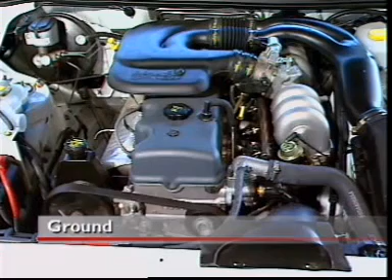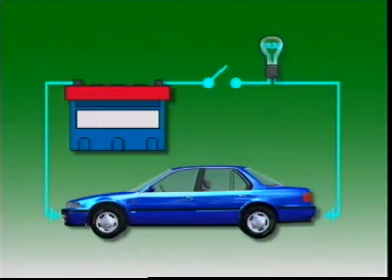Ground is a term used to indicate connecting a component to the vehicle frame or chassis. Current flows from the positive terminal of the battery through a controlling device such as a switch, then through the component. The return path is through the vehicle chassis or frame to complete the circuit and allow the component to operate. Using the vehicle frame in this way simplifies the circuit wiring.

A tachometer is used to indicate engine RPM. It is normally connected to the negative terminal of the ignition coil. The pulses from the ignition primary circuit are then used as an input to operate the tachometer. At idle speed, the frequency of the pulse is steady. As the engine speed rises, the frequency of the pulse increases as the tachometer indicates.

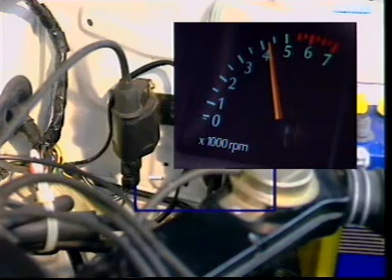A tachometric relay uses the same input from the negative side of the ignition coil to ensure the relay operates only when the engine speed is above a specified minimum, say 350 RPM. In this case, it operates as a safety device, ensuring the fuel pump operates only when the engine speed exceeds this figure.

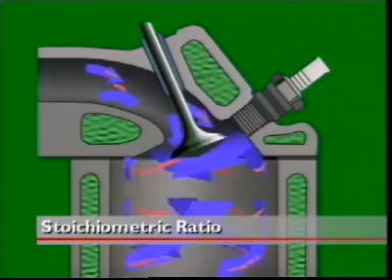The term stoichiometric ratio describes the chemically correct air-fuel ratio necessary to achieve complete combustion of the fuel. It is represented by the Greek letter lambda. The value of the ratio is 14.7 parts of air to 1 part of fuel. By mass, that's 14.7 kilograms of air to each kilogram of fuel. So if lambda equals 1, the air-fuel mixture is at the stoichiometric ratio of 14.7 to 1.

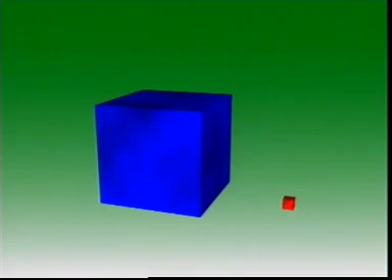If an air-fuel mixture has a higher figure, say 1.03, there is more air in proportion to the fuel than 14.7 to 1, and the mixture is slightly lean. A mixture with a lower lambda value has less air, proportionately, than fuel, and the mixture is slightly rich.

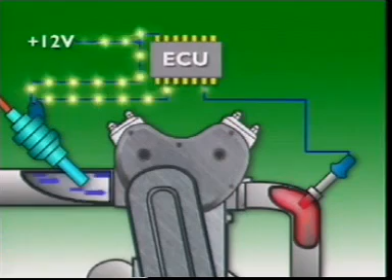The exhaust gas oxygen sensor is also called the lambda sensor, since it can be used to maintain the air-fuel ratio at lambda equal to 1, within very close limits. It can be installed in the exhaust manifold, where it measures the percentage of oxygen in the exhaust gases. A high percentage of oxygen may mean too little fuel is entering the engine, the mixture is too lean, and the lambda is greater than 1.

The sensor delivers this information to the ECU, which adjusts the mixture accordingly. Similarly, a low percentage of oxygen may indicate too much fuel is entering the engine, the mixture is too rich, and the lambda is less than 1.

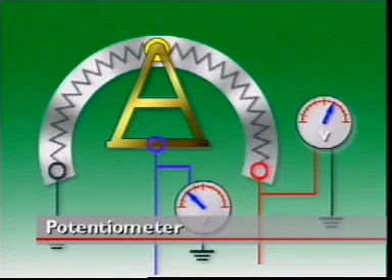A potentiometer is a mechanically variable resistor which, in EFI applications, is normally a film type. It can be linear or circular in construction and has 3 electrical connecting points. 2 are at the ends of the resistor and the third is attached to a center sliding contact, arranged to move across the resistor. A reference voltage is applied to the resistor so that a steady current flows through it.

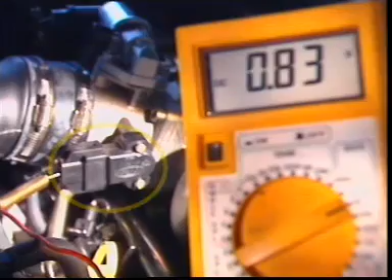As the center sliding contact moves across the resistor, it measures the voltage at the point it is in contact with, and provides a reference voltage for that position. In automotive applications, the circular form is commonly used as a throttle position sensor, with the center contact attached to the throttle plate. The throttle plate position can then be monitored by the control unit.

The density of air is its mass per unit volume. This means a volume of air at high density has a higher mass than the same volume at low density. And if there is a larger mass of air, it will contain proportionally more oxygen.

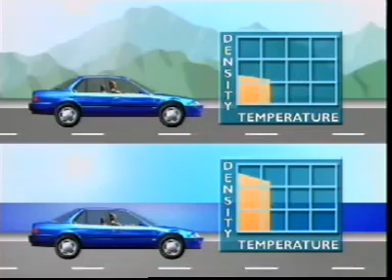The density of air in the atmosphere changes at different temperatures and altitudes. That means the air that enters an engine at different locations could have very different amounts of oxygen. The amount of oxygen in air directly affects how well it supports combustion, so it can be important in determining an air-fuel ratio for an engine.

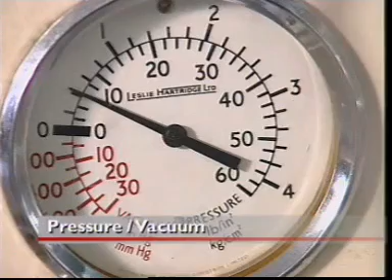Pressure and vacuum are terms in everyday use in the automotive industry. Manufacturers recommend a pressure to which tyres need to be inflated, and manifold vacuum is used to operate a brake booster. Gases exert pressure on all bodies they make contact with.

This applies also to the air in Earth's atmosphere. Air has mass, and as a result it exerts pressure, called atmospheric pressure, not only on the Earth's surface, but also on all objects on the Earth's surface.

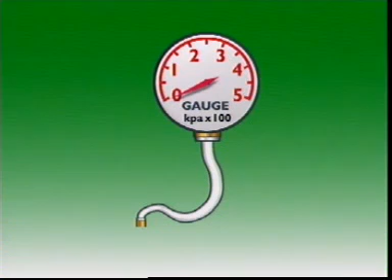Atmospheric pressure varies with altitude, but at sea level it is calculated as 101.3 kilonewtons per square metre, or 101.3 kilopascals. But if this is so, why does a pressure gauge read 0 when it is not in use? This is because the gauge indicates pressure above atmospheric pressure only. This reading is called gauge pressure.

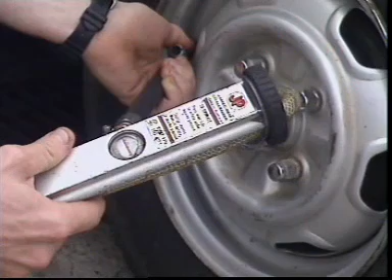If absolute pressure was needed, an absolute pressure gauge would be needed, and it would read 101.3 kilopascals when not in use. Absolute pressure equals gauge pressure plus atmospheric pressure. Readings on an oil pressure gauge or a tyre gauge should really have 101.3 kilopascals added to them. It is normal practice, however, for the gauge reading alone to be taken as the accepted value.

If pressure being measured is below atmospheric, a pressure gauge with its 0 reading is of no value. This is why, for pressures below atmospheric, as in a manifold vacuum or depression, a vacuum gauge is normally used.

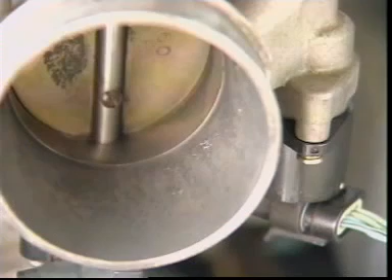In a petrol engine, the position of the throttle plate controls the volume of air, or air-fuel mixture, entering the manifold. At idle speed, the pistons draw air away from the manifold at a faster rate than it can pass the throttle plate into the manifold. A high vacuum, or a depression, exists.

At wide open throttle, depending on load, the vacuum is much less, and pressure in the manifold rises, closer to atmospheric. A vacuum gauge can be calibrated in millimeters of mercury, and the scale reads from 0 to 760.

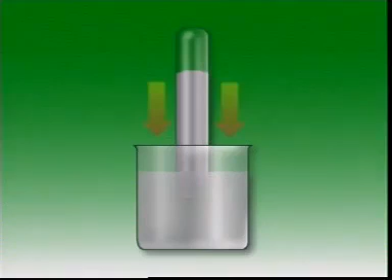The scale is derived from the fact that atmospheric pressure supports a column of mercury 760 millimeters high. This glass tube, closed at one end, is filled with mercury, then inverted in a bowl of mercury. The column of mercury in the tube falls to about 760 millimeters. The space above the mercury is a vacuum, and the atmospheric pressure on the exposed surface of the mercury supports the column. At sea level, atmospheric pressure supports a column of mercury 760 millimeters.

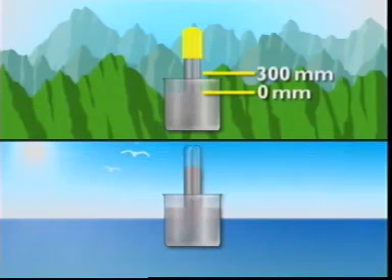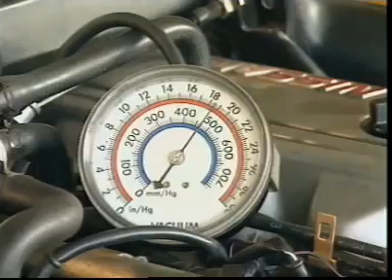But at higher altitude, its height falls, which indicates that atmospheric pressure at that altitude is less. A scale of 0 to 760 millimeters can thus be used to indicate the degree of vacuum or depression that exists below atmospheric pressure. At idle speeds, a vacuum gauge connected to the intake manifold will indicate a reading of approximately 450 to 500 millimeters of mercury, depending on altitude.

Some engine management systems signal changes in atmospheric pressure by using a barometric pressure sensor in the ECU. This is because, above sea level, air pressure is reduced. So to maintain correct air-fuel ratio, a vehicle has to reduce the amount of fuel delivered to the engine.

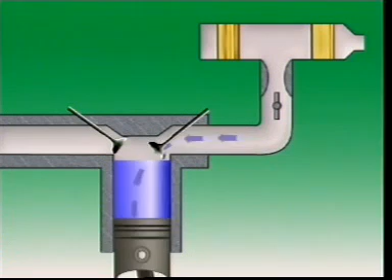Volumetric efficiency compares the volume of air entering a cylinder during intake to the internal volume of the cylinder when the piston is at bottom dead center. It is usually expressed as a percentage. In a naturally aspirated engine, one without forced induction, volumetric efficiency can never be 100%. This is because of the resistance to the airflow that occurs at the carburetor, manifold, and the intake valve.

With forced induction, the incoming air is compressed so that a greater volume and mass of air is forced into the cylinder during the intake stroke. That takes the volumetric efficiency to above 100%.

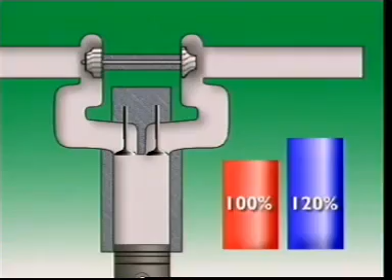This section examines basic principles of electronic fuel injection. Because of the need to comply with exhaust emission regulations, the modern petrol engine requires a fuel system of extreme accuracy and long-term reliability. A correctly matched air-fuel ratio must be available at all times and under all conditions. This is satisfactorily achieved by electronic fuel injection.

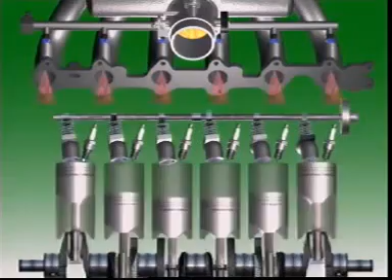EFI is a pressurized indirect injection system that uses solenoid-operated injectors with a fixed orifice. When they're energized, fuel passes through the injector body. This arrangement is called a multi-point system. One injector is located in each intake manifold runner or pipe adjacent to each cylinder.

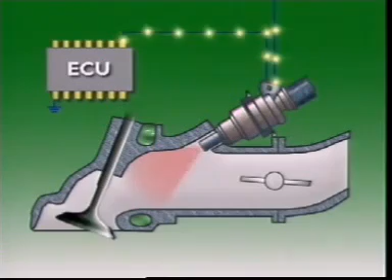An electronic control unit, or ECU, opens the injectors by pulsing their electrical current. They spray fuel into each intake port directly in front of each intake valve. Fuel leaving the nozzle is atomized, and it mixes with the air also entering the system to form a combustible mixture.

Fuel pressure is kept at a constant value above manifold pressure, so that the amount of fuel injected is determined only by the length of time the injector is held open by the ECU. This is called the pulse width of the injector.

The triggering signal to operate the injectors can be supplied from the ignition system or from crank angle sensors on the crankshaft or the camshaft. Engine fuel requirements change according to engine speed, load, and temperature, so the ECU needs information on these changes. Sensors measure these variables, then relay the information to the ECU in the form of electrical signals. The ECU then calculates the duration of pulses necessary to provide the fuel required.

Extra fuel required during cold starting can be supplied by increasing the number of injection pulses, or by fitting a separate cold start injector that operates independently of the main injectors when the engine is cranking.

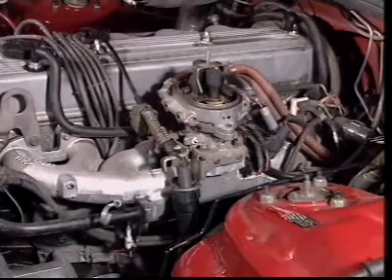The throttle body injection system, also called a central fuel injection system, has a single injector, or in some cases 2 injectors, mounted in a carburetor-like throttle body. The throttle body assembly is fitted to the flange of the intake manifold, and fuel is sprayed into the intake air entering the manifold. The air-fuel mixture is then carried through the manifold into the engine. Fuel pressure is maintained at a constant value, and an ECU pulses the injector or injectors.

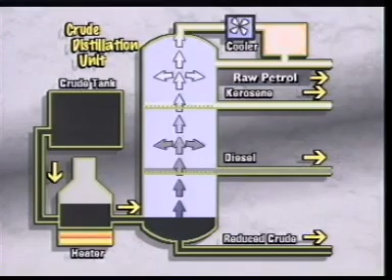This section examines petrol fuel. Petroleum or crude oil is taken out of the ground as a mix of impurities and highly flammable compounds of hydrogen and carbon, called hydrocarbons. It is processed into many products, including petrol and diesel fuel.

Petrol is used in different forms in different engines. It is very volatile, mixing easily with air to form gas or vapour. The more effectively liquid petrol is changed into vapour, the more efficiently it burns in the engine, so high volatility is desirable.

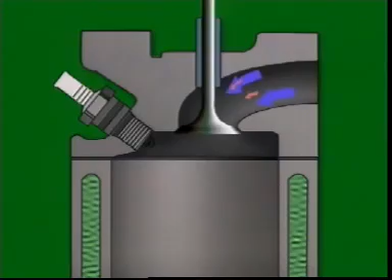How petrol burns must be controlled. If it burns too quickly, it can cause detonation, sometimes called ping or knock. So special additives are used to slow down the rate of combustion. Octane rating is a measure of how well a petrol resists detonation. The higher the rating, the less likely it is that detonation will occur.

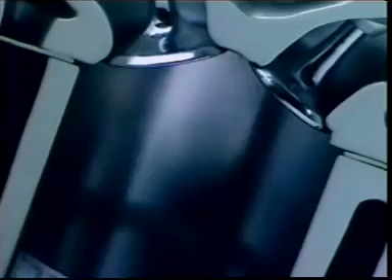Higher operating pressures in the combustion chamber can also cause abnormal combustion. A lead-based anti-knock additive used in leaded petrol can allow these higher pressures without loss of performance. Lead additives are also lubricants. In high-compression engines, lead compounds coat valve faces and seats and help prevent wear.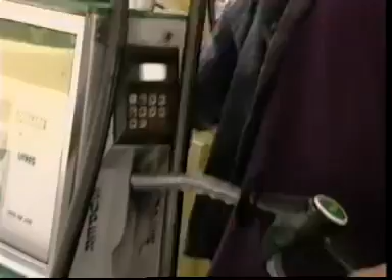Leaded petrol is used in older cars that have few or no emission controls. It should never be used in engines designed for unleaded fuel. Governments now limit levels of lead in petrol, and unleaded petrol is replacing leaded petrol. So-called unleaded petrol may contain small amounts of lead, but maximum levels are tightly controlled.

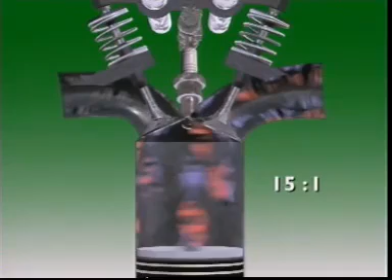For petrol to burn properly, it must be mixed with the right amount of air. For a petrol engine, the air-fuel ratio by mass is about 15 to 1. By volume, it's about 11,000 to 1. Not much petrol, but lots of air.

A lean air-fuel mixture has more air in proportion to the amount of fuel. A slightly lean mixture gives good fuel economy and low exhaust emissions, suitable for cruising conditions. A mixture that's too lean can make an engine run roughly and overheat.

A rich air-fuel mixture has less air in proportion to the amount of fuel. A slightly rich mixture can produce more power at lower temperatures, but the extra fuel it uses steps up fuel consumption and emissions. A too rich mixture fouls spark plugs and causes incomplete burning, and that reduces power.

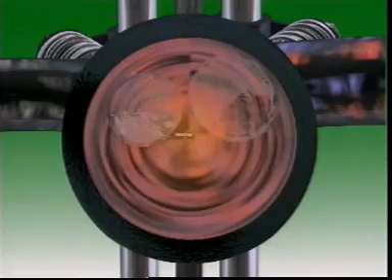In normal combustion, the spark plug ignites the mixture and a small ball of flame forms around the tip of the plug. The piston compresses the mixture, the flame spreads faster and moves evenly to halfway through the mixture. The piston reaches top dead center. The flame picks up more speed, then shoots out to consume the rest of the mixture. Combustion ends with the piston a short way down the cylinder.

Detonation is a violent collision of flame fronts in the cylinder caused by uncontrolled combustion. It occurs after the spark plug has fired. The sudden rise in pressure can cause a knocking sound.

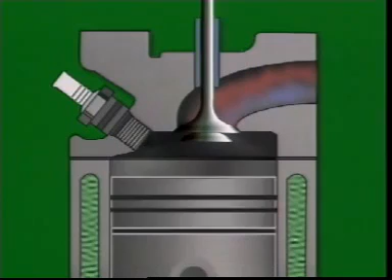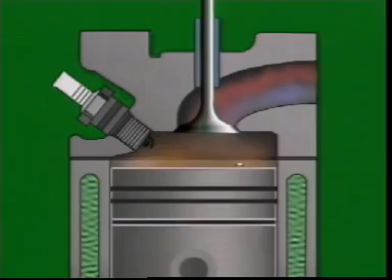Sustained detonations can lift temperatures enough to cause pre-ignition, also called auto-ignition. Pre-ignition occurs before normal combustion, when something in the combustion chamber heats up enough to ignite the mixture before the spark plug fires. A mixture may also ignite simply because it is unstable under the higher heat and pressure. Detonation and pre-ignition can cause severe damage and must be avoided. Engine management systems use knock sensors to detect detonation, and they retard ignition to stop it.

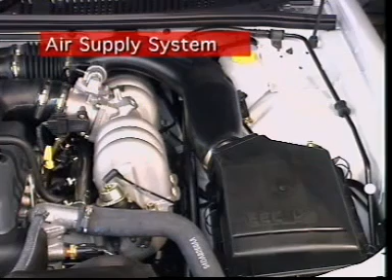This section examines the air supply. In multi-point injection systems, the air required for the combustion of the fuel is led from the air filter through the throttle valve and into the common manifold or plenum chamber. From here, individual intake runners or pipes branch off to each cylinder. All of these pipes are of equal length.

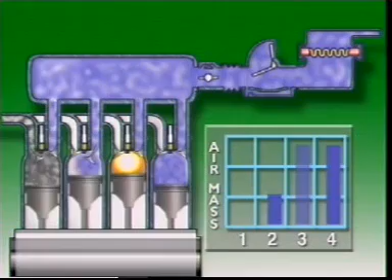The design of the intake system determines how large an air mass can be drawn into a cylinder at any given engine RPM. This is where most advantage can be taken of electronic fuel injection, since it can achieve exactly uniform distribution of the air delivered to the cylinders.

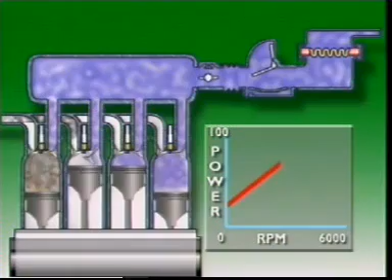With unobstructed passages to each cylinder, the cylinder fills with air as efficiently as possible. The breathing of the engine, or its volumetric efficiency, is improved. The more air crammed into the cylinder, the denser the air-fuel mixture when ignition occurs. This increases the thrust on the piston and increases engine power output too.

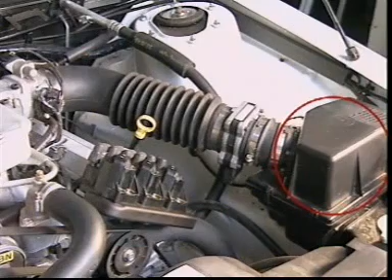The temperature of the air influences how dense the air-fuel mixture will be. Cold air is denser than hot air, so it has a greater mass in any given volume. This is why, on most intake systems, the air entry to the intake is away from engine heat, to ensure the entry of cool air.

Since the manifold carries air only, it doesn't need to be heated by coolant. Filtered air arrives at the intake port as cold and dense as possible, ready for mixing with the fuel from the injector.

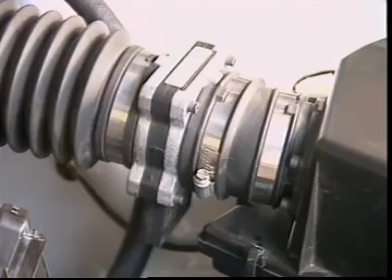The amount of air entering the engine must be measured, so that the amount of fuel injected into it forms a mixture to suit the engine operating conditions at that time. The volume of air entering the engine varies according to the position of the accelerator pedal and the engine speed and load. Changes in volume are reflected in changes in manifold pressure between the throttle plate and the intake ports.

When the pistons draw air away from the manifold more quickly than air can pass the throttle plate into it, the pressure in the manifold falls. At idle speeds, this pressure is low. A high depression or a vacuum exists. As the throttle plate opens, the pressure approaches that of the atmosphere. The depression or vacuum tends to fall in value.

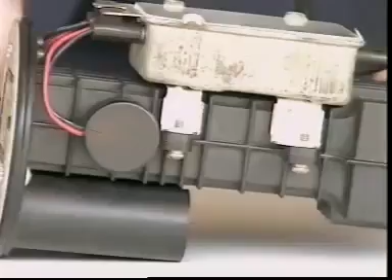Devices measuring air entering the engine send a varying electrical signal to the ECU. The signal can be a measure of the volume of air or of the manifold pressure. In both cases, this information is combined with the engine speed signal to provide the basic setting for the injector pulse width.

An airflow meter measures the volume of filtered air entering the engine. It can be mounted on the air filter casing or close by. All air entering the intake flows through the meter, then through a sealed flexible hose or duct to the throttle body, then enters the engine.

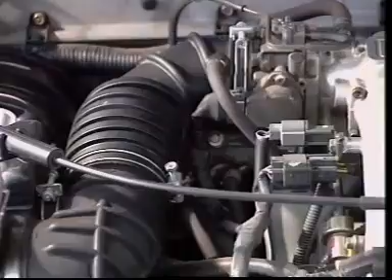Vane-type airflow meters have a spring-loaded vane or flap, which deflects according to how much air enters. The electrical signal to the ECU varies with this deflection, as contacts attached to the vane move across a potentiometer. The intake system must be airtight, with no leaks downstream of the meter, otherwise inaccurate signals will be sent to the ECU.

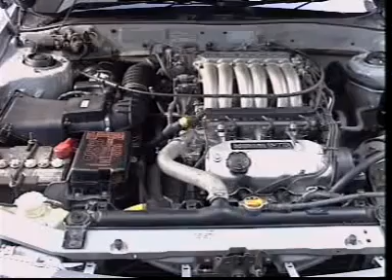This section examines the fuel supply system.

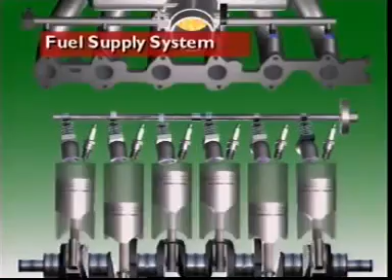The purpose of any fuel supply system is to deliver fuel to the engine in a form in which it can mix with air to form a combustible mixture. The fuel must be finely atomized to mix with the air. This is why injection systems deliver the fuel under pressure.

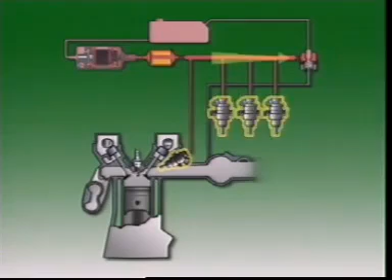The EFI system is a circulation system. Fuel is drawn from the tank by a fuel pump and delivered to solenoid-operated injection valves. Fuel pressure at the valves is maintained by a fuel pressure regulator, and excess fuel flows back to the tank through a return line. The fuel filter is directional. It is fitted between the pump and injection valves to stop contaminants reaching other parts of the system.

The fuel pump can be mounted externally on the chassis frame or submerged in the fuel in the tank. It is electrically operated and electronically controlled. It is driven by a permanent magnet electric motor, a sealed unit integral with the pump. Fuel flows through the pump and around the electric motor when it is running. There is never an ignitable mixture inside the pump housing, so there is no danger of explosion.

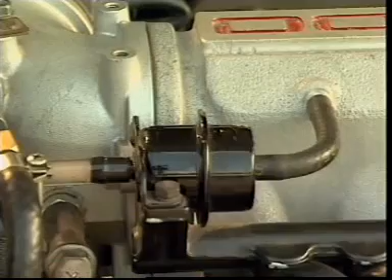The pump delivers more fuel than the maximum requirement of the engine, so pressure in the fuel circulation system is maintained at all times. A fuel pressure regulator maintains fuel pressure between the pump and the injectors.

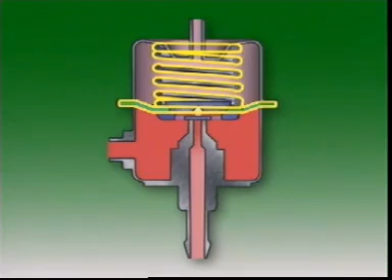In multi-point injection systems, the fuel pressure regulator has an inlet connection from the fuel rail and an outlet that lets fuel return to the tank. A control diaphragm and pressure spring determines the exposed opening of the outlet and the amount of fuel that can return. So the strength of the pressure spring determines fuel pressure in the fuel rail and keeps it at a fixed value.

However, the pressure in the intake manifold varies considerably with changes in engine speed and with load, so the pressure drop across the injector must also be taken into account. For any injection duration, if fuel is held at constant pressure, then as manifold pressure varies, so does the amount of fuel delivered. That means fuel pressure must be held constant above manifold pressure.

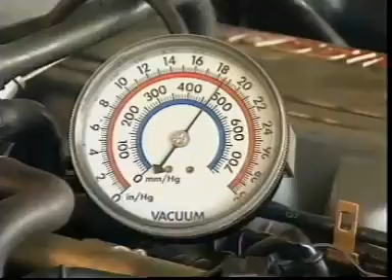This is done by sealing the spring housing of the pressure regulator and letting it sense manifold pressure via a connecting hose. Then, when the manifold pressure alters, so does the fuel pressure. When manifold pressure is low, as at idling, fuel pressure is low. As manifold pressure rises towards open throttle, so does fuel pressure.

Since the injectors are all subjected to the same pressure, they all inject an equal amount of fuel. The quantity of fuel delivered is thus controlled very accurately by the pulse width of the injector.

Manifold pressure sensing is not required in throttle body systems, as the injection occurs above the throttle plate at atmospheric pressure. So fuel pressure is determined by the force of the regulator spring acting on the diaphragm.

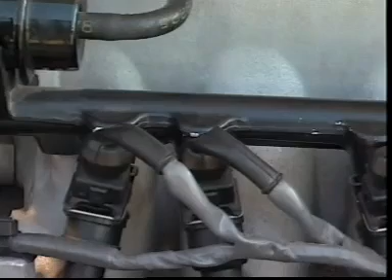The injectors are sealed into the manifold by O-rings that prevent air entering at that point. The O-rings, together with plastic caps on the injector nozzles, also act as a barrier to heat being transferred to the injector body. For a short time after an engine is switched off, engine temperature keeps rising, and that can cause excessive vapour in the fuel lines.

This pump stops this with a non-return valve on its outlet, which maintains the pressure in the fuel line during that short time. This pressure will decay over about 20 to 30 minutes, but it ensures effective hot starting characteristics.

When the engine is running, the circulation of fuel ensures cool fuel is being delivered at all times, and vapour formation is prevented. The pump control circuit normally allows the pump to operate for a few seconds only when the ignition is switched on, and thereafter during cranking, and when the engine is running above a specified minimum RPM.

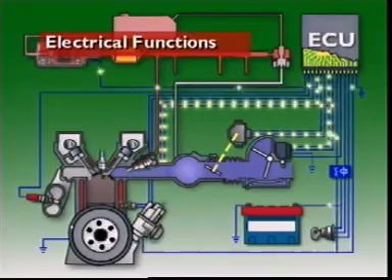This section examines electrical functions in EFI. In the electrical system, detecting elements sense engine operating conditions and relay this information in the form of electrical signals to the Electronic Control Unit, or ECU. The ECU is a small computer programmed with the operating characteristics of each individual application. This information is stored in its memory.

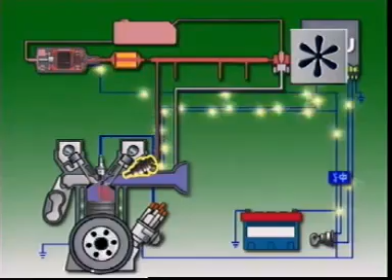The control unit processes input signals to determine the amount of fuel required by the engine at that instant. It then grounds the injection valve circuit to open the solenoid-operated injection valves. The length of time injectors stay open in milliseconds determines how much fuel is injected.

A basic EFI system needs input signals on ignition switch operation, engine cranking, the amount of air entering the engine, coolant temperature, throttle position and engine speed, and battery voltage. The varying data received from all of these inputs allows the ECU to arrive at its injection setting.

This vehicle began from a cold start and has been running only a short time. It is now operating in top gear with a light throttle only. What influences its fuel requirements?

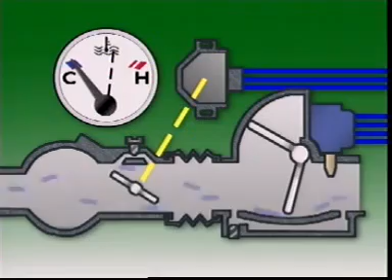A relatively small volume of air is entering the engine. The throttle position is associated with economy or cruising conditions. Engine speed is in the low to mid-range. Coolant temperature is still below normal. These factors combined produce a fuel setting.

It is less than if the throttle were opened suddenly for acceleration or to overcome increased load. However, it is more than it would be if coolant temperature were at its normal level.

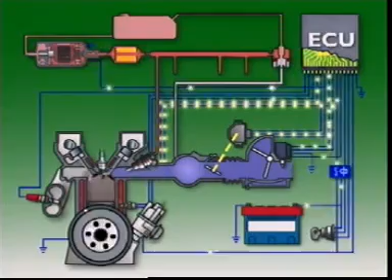The varying signals can be supplied by variable resistors, by switch contacts, by voltage pulses from the ignition system, or by sensors.

An airflow meter varies its signal by the deflection of a vane as air enters the engine. Deflecting the vane moves contacts across a potentiometer to signal its position and thus the amount of air entering the system.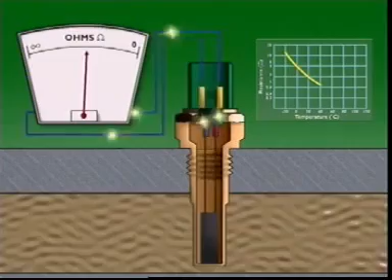The temperature sensor uses material with a negative temperature coefficient of resistance. Its resistance is high when it's cold, but it falls as its temperature rises. It's called a thermistor. This is the opposite of a normal resistor, which increases its resistance as temperature rises.

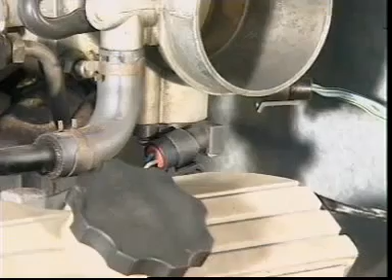The coolant temperature sensor is immersed in coolant in the cylinder head. The air temperature sensor is in the air intake at the airflow meter or in the manifold.

Throttle position can be signaled by a potentiometer attached to the throttle shaft. It provides a continuous varying signal through the entire range of throttle position. Throttle position can also be signaled by a contact type switch, but it signals the idle and fully open positions only.

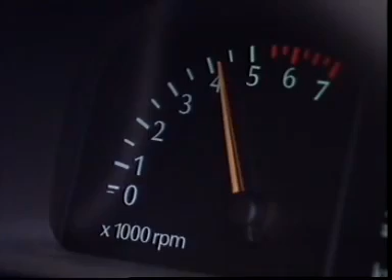Engine speed can be detected by a connection from the ignition system primary circuit or by a pulse generator type sensor on the crankshaft. The pulses are computed by the control unit into an engine RPM figure. They can also be used to trigger the injectors.

In multi-point injection, the injectors can all be triggered at the same time. This is called simultaneous injection, and the injectors operate twice per cycle, once each crankshaft revolution, each time delivering half the fuel for the cycle.

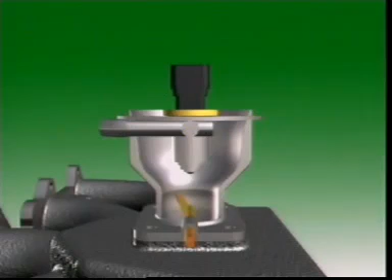In a 6-cylinder engine, the injectors are triggered on every third ignition pulse. In throttle body systems, the central injector is normally triggered on every ignition pulse. However, if there are 2 injectors, alternate triggering may be used. At idling speeds, the frequency may be less to provide finer control.

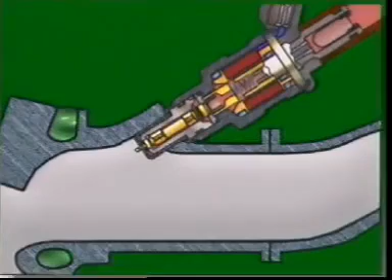The actual operating time of the injectors depends very much on battery voltage. The response time to lift the injector needle to the fully open position is about 1 millisecond. If battery voltage is low, this response time takes longer and the engine receives less fuel. The ECU can compensate for this delay in opening time by extending the duration of the injection pulse.

In more sophisticated engine management systems, the control unit can control additional functions such as ignition timing, injection modes, idle speed, cooling fans, and fuel pump operation. To do this, however, more inputs are needed.

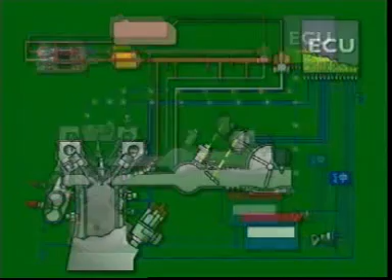To control ignition timing, some systems replace the distributor with a direct fire ignition system. Between one ignition point and the next, the ECU calculates when the ignition point will occur. It then triggers the ignition accordingly. Ignition can be varied according to load, speed, coolant temperature, cranking speed, and battery voltage.

Identifying number 1 cylinder and the camshaft position allows different injection modes to be used. Sequential injection means injection occurs in the sequence of the firing order. Each injector opens once only in each cycle to deliver the fuel needed.

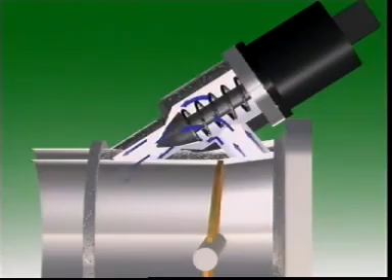Added load placed on the engine during idle can be compensated for by increasing the passageway of an idle speed control device. This lets more air bypass the throttle plate. This air has been measured by the airflow meter, so extra fuel is metered to maintain the same air-fuel ratio. The extra mixture thus delivered increases engine torque and maintains idle speed.

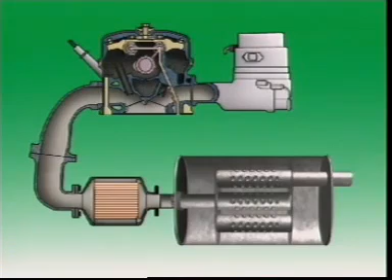For efficient operation of the catalytic converter, the mixture ratio must be maintained close to the stoichiometric ratio, 14.7 parts of air to 1 part of fuel.

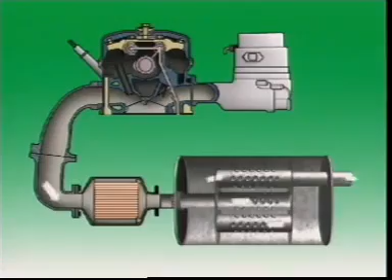Efficiency of combustion can be monitored by measuring the percentage of oxygen in the exhaust gas. A high percentage may mean the mixture entering the cylinder is too lean.

The oxygen sensor in the exhaust manifold or in the engine pipe tells the ECU how much oxygen is in the exhaust gas. The ECU then varies injector opening time to achieve a correct mixture ratio.

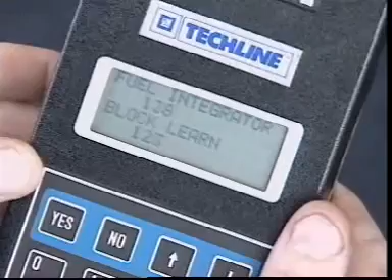Feedback also lets fuel settings change as components age. This is called adaptive learning. The ECU memorizes its fuel settings for different operating conditions and stores them for future use.

If a fault occurs in a component or part of a system, a fault code can be displayed on the check engine lamp in front of the driver. Alternatively, a scanning tool can be connected to a diagnostic terminal and information on the fault can be analyzed.

Although most injectors operate at the nominal battery voltage of 12 volts, many sensors have a reference voltage of 5 volts. This is done by a voltage regulator in the control unit. It gives more accurate signaling, as fluctuations due to changes in battery voltage do not occur.

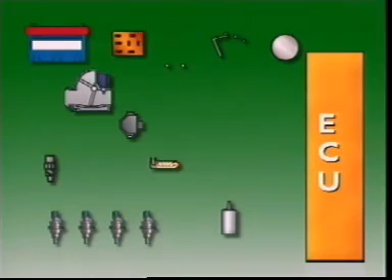This is a simplified wiring diagram for an EFI application. The battery is grounded to the vehicle frame at the negative terminal. Its positive terminal is connected to a tachometric relay and to the ignition switch.

A connecting wire runs from the tachometric relay to the positive terminal on the fuel pump. A fuse in the connecting wire protects the circuit. The fuel pump circuit is completed by grounding the fuel pump negative terminal to the frame of the vehicle.

When the fuel pump operates, current flows from the battery to the pump. It flows through the pump to rotate the armature and completes the circuit by flowing from the negative terminal through the vehicle frame to the battery negative terminal.

Similarly for the other components in this simplified system. Positive connections are made to a number of components from the tachometric relay. The relay only operates when the engine is cranking or running, so no current flows in any connecting wires at other times.

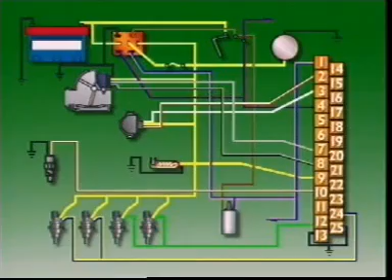Identification of the sensors and their inputs allows easier identification of the wiring diagram for any given system. Follow the circuit for each component from the battery positive terminal and trace its path back to the negative terminal. Components are earthed either through the vehicle frame or the ECU.

The other EFI discs in this series examine in more detail some more sophisticated engine management systems and the operation of their components. You should view these other discs, then investigate these more complex systems for yourself.